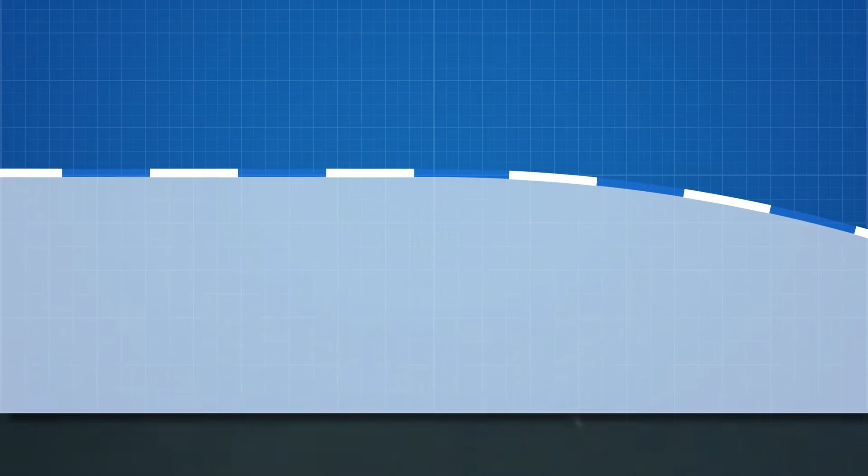Let's think about this with a simple analogy. Here we have two situations, a ball placed on top of a hill and a ball placed in a valley. If we push the ball on top of the hill, even a tiny bit, it will begin to accelerate down the hill and will not stop until we put energy in to slow it down. We will need to put even more energy in to return it to the top of the hill. This is an unstable system.

The opposite is true for the ball in the valley. Apply a force and the ball will roll uphill, and gravity will now provide a restoring force to bring it back. It may oscillate back and forth a few times before coming to a stop, but it will eventually return to its original position. This is a stable system.

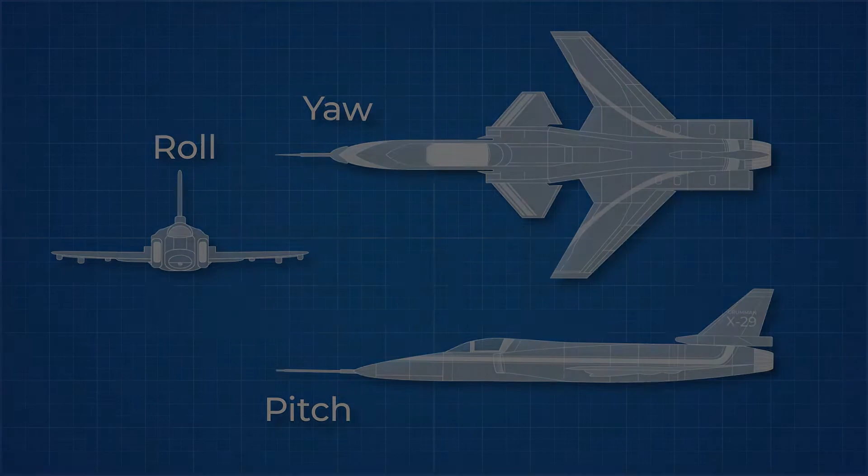So how does this apply to planes? Planes have three rotational degrees of freedom: pitch, roll, and yaw. Let's first approach this problem with regards to pitch stability, which is where the X-29 was extremely unstable.

Small general aviation planes like Cessnas are designed to be very stable, and so return to level flight automatically after they are knocked up or down by a gust of wind. But how do they manage this?

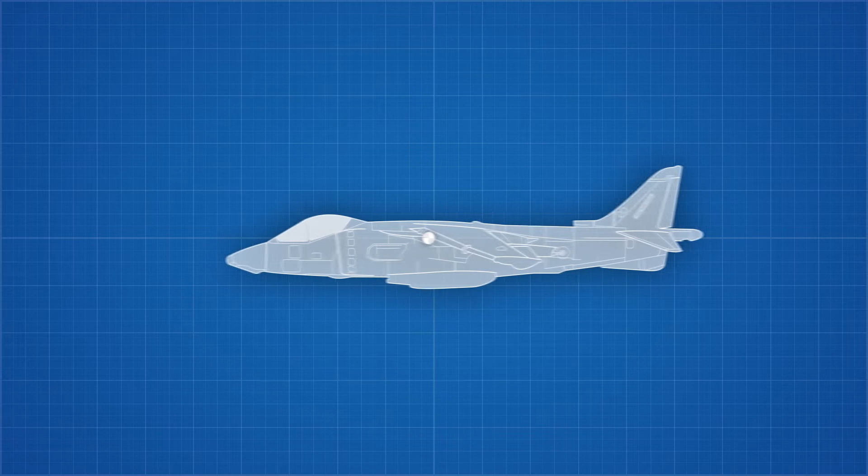Pitch stability is determined by three primary factors: the location of the center of gravity, the location and design of the wing, and the location and design of the horizontal stabilizer.

The center of gravity for our Cessna is located about here. This is the point which all lift will act around, like the fulcrum on a seesaw. Our wing is located slightly behind this, and thus the lift it generates is slightly aft of the center of gravity. This would force the plane to pitch downwards without a counteracting downwards force further back on the plane.

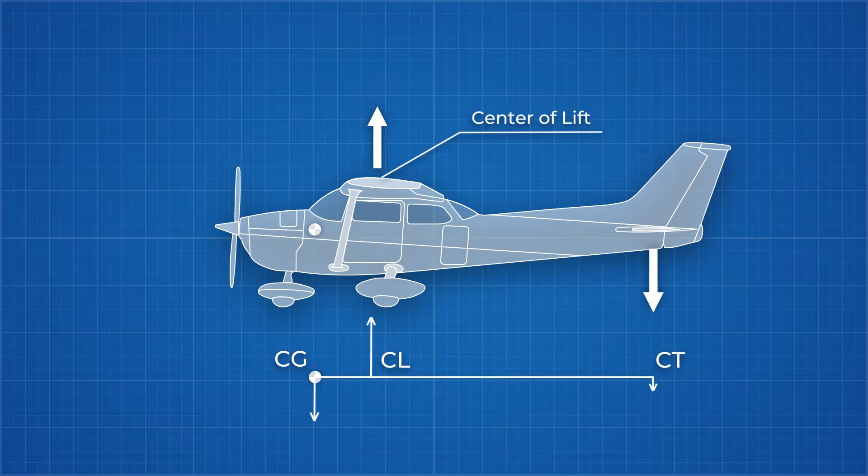Which is exactly what the horizontal stabilizer provides, a downwards force. This force does not need to be the same magnitude, as it has greater control authority as a result of its greater distance from the center of gravity, once again, just like a seesaw.

This is how a plane maintains pitch stability without any outside influences. But what happens if turbulence knocks our plane off balance? If the forces remain the same, the plane would continue on in whatever orientation the gust knocked it into.

This is not what happens. Just like our ball in a valley example, we have a restoring force to bring the plane back to its original position. This is a result of how our horizontal stabilizer's downforce changes with the pitch of the plane.

There are two primary factors that influence this. The first is downwash. When air passes over the wings, it is deflected downwards, creating a downwash of air behind the wing. This downwash strikes the top of the horizontal stabilizer, and this produces a downward pressure.

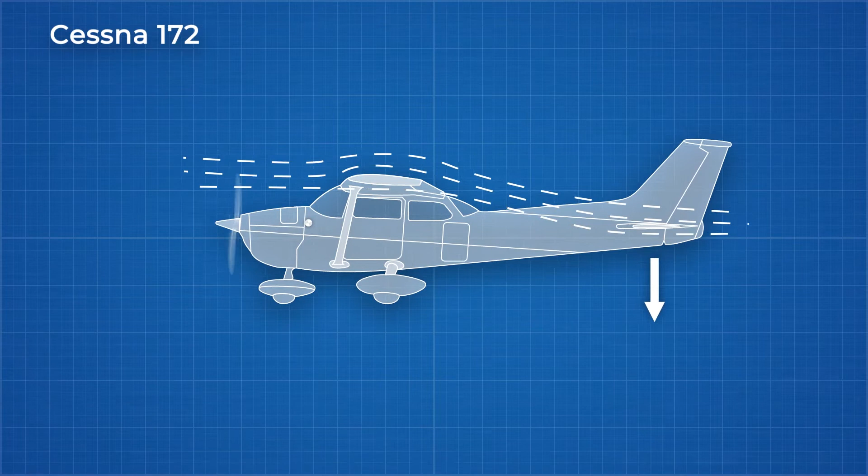The magnitude of the downforce on this surface is dependent on downwash, and the magnitude of the downwash is dependent on the speed of the aircraft. The faster we go, the more air is deflected downwards. The slower we go, the less air is deflected.

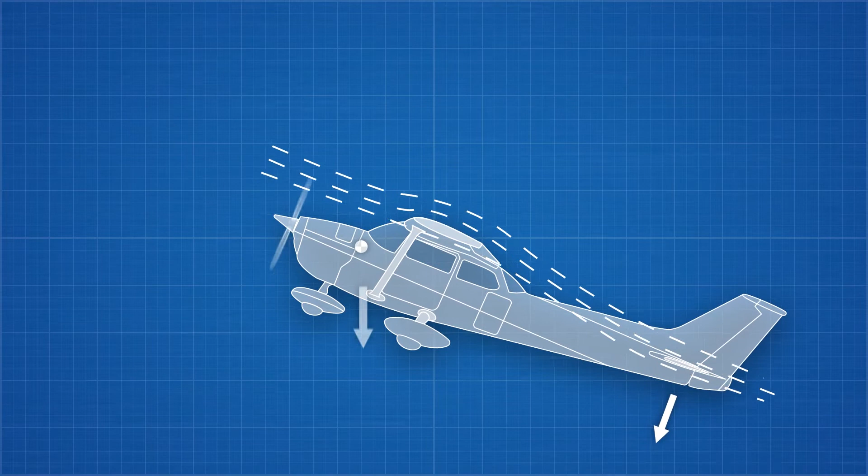Luckily, our speed is also dependent on our pitch. If the plane pitches upwards, it will lose airspeed, and the downforce on the horizontal stabilizer decreases. As a result, the weight of the plane acting through the center of gravity, forward of the center of lift, now wants to move the nose down again.

The opposite happens when we pitch the nose down. Here we gain airspeed and the downwash on the horizontal stabilizer increases, causing the downforce to increase, forcing the plane to nose up again. This explanation is often provided as a complete explanation, but it falls apart when you consider

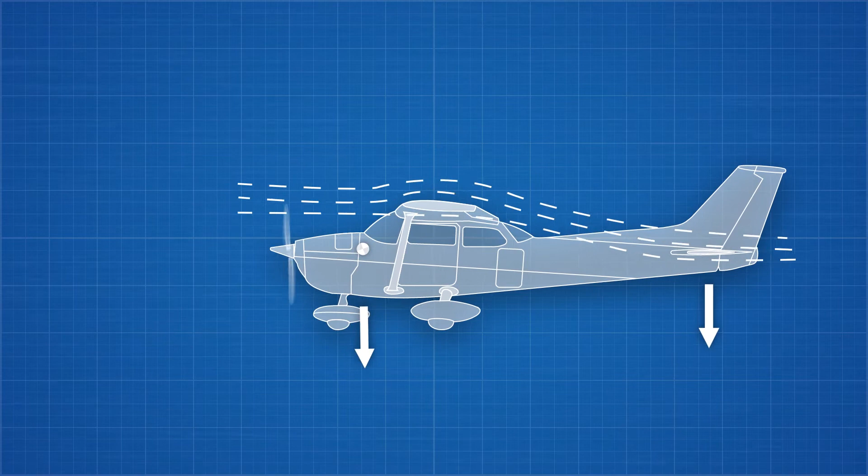a T-tail configured plane, where the horizontal stabilizer is lifted out of the downstream airflow of the wing. Here, our other factor comes into play, as a result of the angle of attack on the horizontal stabilizer. Here, the horizontal stabilizer has a negative angle of attack.

This angle of attack changes as the plane pitches up or down. If we pitch it up, the angle of attack decreases, and thus the downforce decreases, allowing the weight of the nose to pull it back down. If the plane pitches down, the angle of attack increases and increases the downforce, which forces the tail of the plane back down.

This is an elegant solution to the problem, which is thrown out the window for planes like the X-29. Here we have the forces acting upon the X-29 in the longitudinal plane. The center of gravity and the center of lift have shifted backwards as a result of the forward-swept design, and thus, in order to stabilize the plane, the canards need to produce lift ahead of the center of gravity.

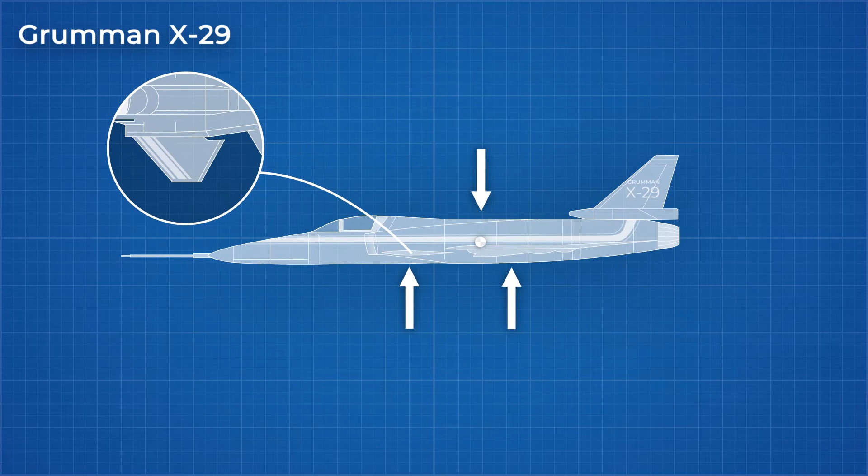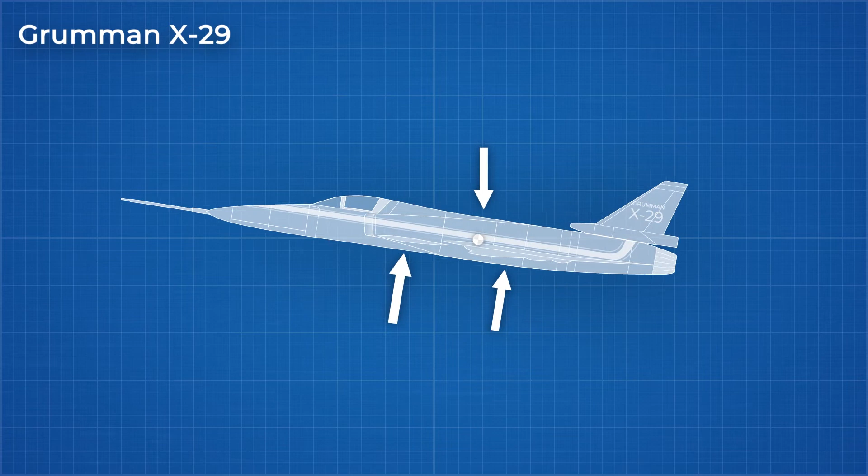This is fine in level flight with no disturbances, but what happens if we pitch upwards? Here there is no downwash that shifts to increase downforce on the stabilizer. The angle of attack on the canards also increases with increased pitch, which increases the lift forward of the center of gravity, which pitches the nose up even more.

And thus, for a very small energy input, we could pitch the plane a tremendous amount, just like giving that ball on the hill a little nudge. This is great when you want to pitch the plane wildly, but that's not always the case.

To achieve level flight, the X-29's control computers had to be constantly adjusting to compensate for little disturbances, up to 40 times a second. This isn't a huge deal, especially with today's computers. That is not why the X-29 was too unstable.

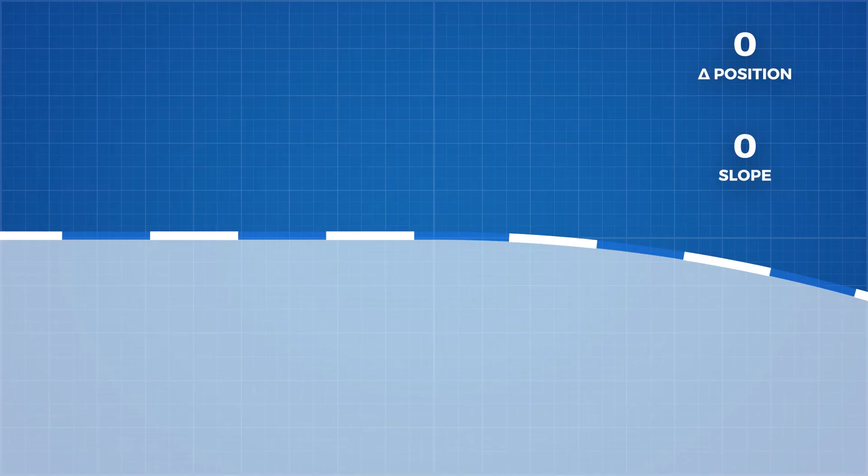Let's take it back to our ball and hill analogy and think about this as an energy problem. If we push the ball and it begins to fall, the steepness of the hill will determine not only how quickly it deviates away from its original position, which is our analogy for maneuverability, but it also affects how much energy we have to put in to roll it back up the hill to return it to its original position.

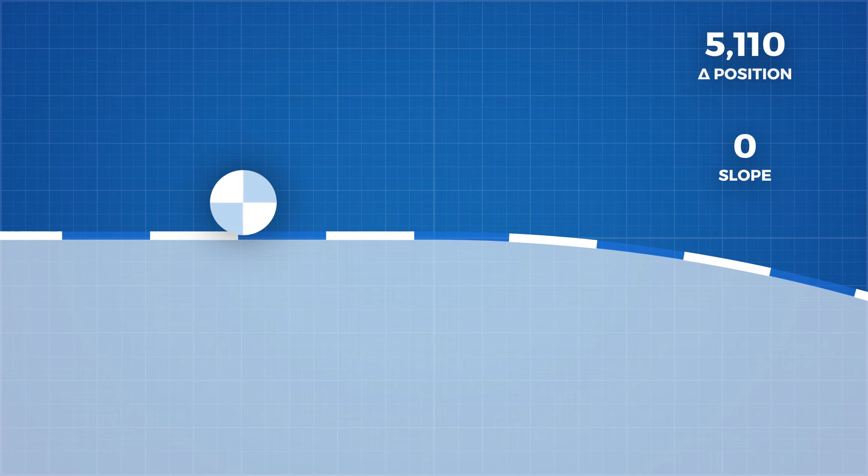This is a problem because our original position is straight and level flight, and we want to return to it at some point. If we make this hill too steep, we have to apply an excessive amount of force to get back to our original position—exactly the problem we're trying to solve with introducing instability, where we have to apply energy to push the ball up the valley walls. We introduce instability to reduce the energy and time required to maneuver, not increase it. In a worst case scenario, we won't have the energy required to return to straight and level flight and end up in an unrecoverable situation.

In an air-to-air battle, energy isn't just a fuel-burning problem, it's a speed problem. Our energy source for maneuvering is our kinetic energy, our speed. To change our orientation, we have to extend control surfaces into the free stream, which creates drag and saps our speed. Fighter pilots have a saying: speed is life. Speed and maneuverability is what wins a dogfight.

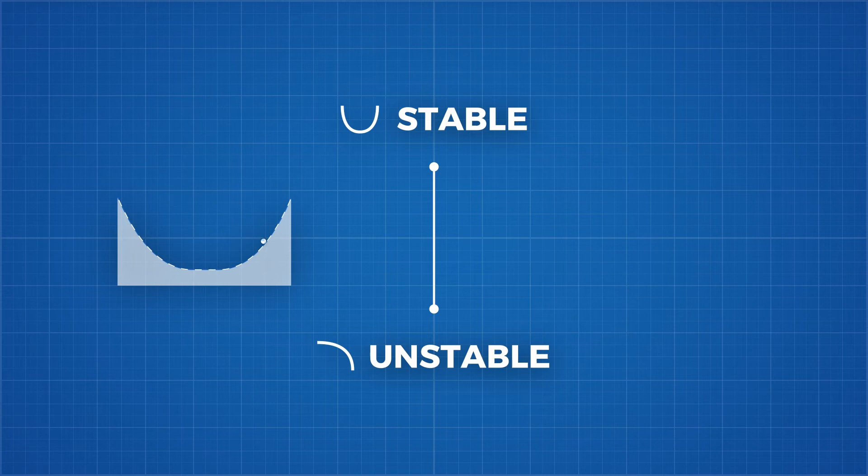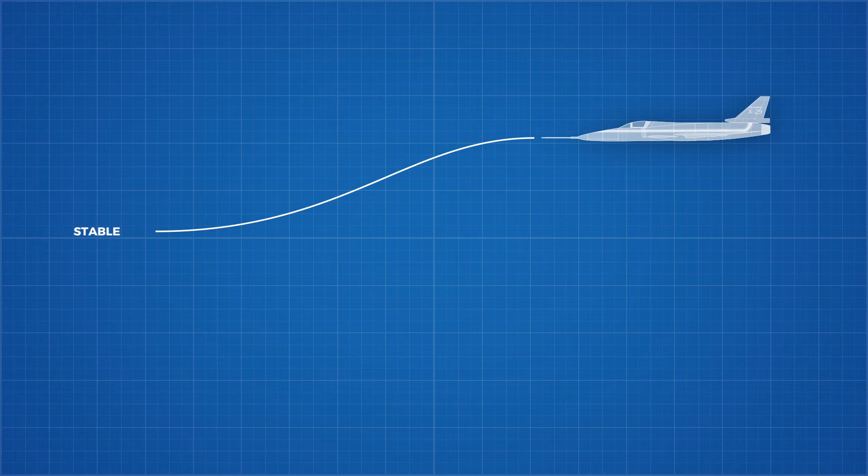In reality, we want to achieve something between a nice level field, where the energy to shift the ball is the same in all directions, and the ball on the hill scenario, where we don't have to apply a huge amount of energy to get the ball to move. Visualizing that with a plane would look something like this. This line would be statically stable, where the plane naturally wants to return to its level flight. This is statically neutral, and this is statically unstable.

The F-16 was the first plane to enter wide service that was deliberately designed to be unstable, departing from many of the design principles that influenced planes like the F-4 Phantom, its older brother. The F-4 was found to have roll instability during wind tunnel testing, so engineers added a 12-degree dihedral to the wing tips to increase roll stability, and the F-4's horizontal stabilizer generated downforce in a similar way to our example earlier, creating a longitudinally stable plane.

The F-16, in comparison, had a noticeably straight wing, making it more or less statically neutral in roll, like our ball in the flat field. The F-16 also shifted its center of gravity rearward, behind the center of lift, and necessitated a horizontal stabilizer that produced lift, making it unstable in pitch—albeit nowhere near as unstable as the X-29—producing a plane that is unstable enough to allow for energy-efficient maneuvering.

This is a complicated topic with a huge number of variables that I haven't mentioned here. For example, the center of lift for a wing tends to shift forward with an increased angle of attack, and with supersonic planes, the center of lift shifts as it goes from subsonic to supersonic flight. There is a lot more to this problem than you are going to get from a YouTube video, and many of my viewers are actually students and practicing engineers who are likely to use this video as inspiration to go and learn more about the subject.